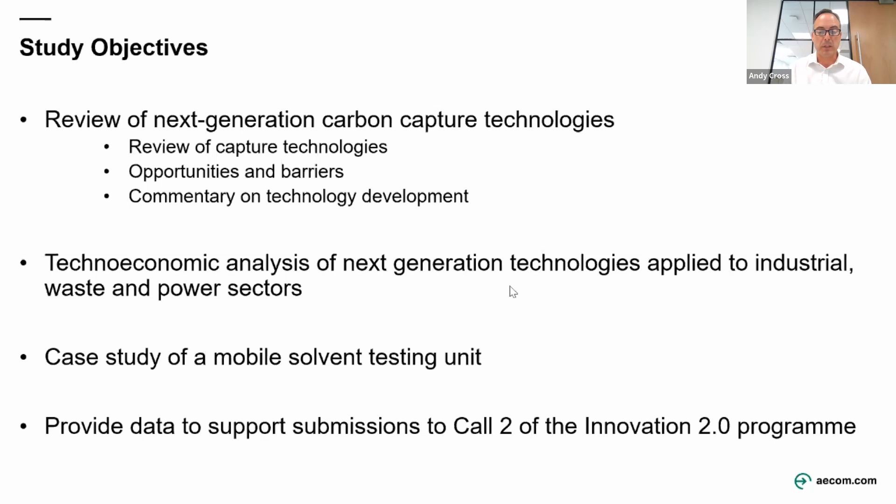So moving on to the next slide, I think that takes us on to the main body of the presentation today, or the first part of that. And I'll hand you over to David Menmuir, who's going to talk you through the review of next generation technology. David, thank you very much. Okay, thanks very much, Andy, for the introduction.

So towards the beginning of the assignment, we conducted a review of next generation carbon capture technologies. This provided our team with a really good solid foundation for completing the rest of the study. Some of you may have heard us talking about this review in a previous workshop. So today's introduction to the review is going to be shorter, but even if you've heard it before, it provides a good background for when we go on to talk about the techno-economic analysis later in the afternoon. So next slide.

So when you're considering carbon capture technologies, there's lots of new technology concepts out there, but it's important to remember that in certain industries, carbon capture is actually already done, or not done, but actually very easy to do. And these industries are industries where CO2 is naturally produced in a concentrated stream. So these are things like brewing and distilling, upgrading of biogas to produce biomethane, and chemical manufacturing processes that involve producing hydrogen from methane.

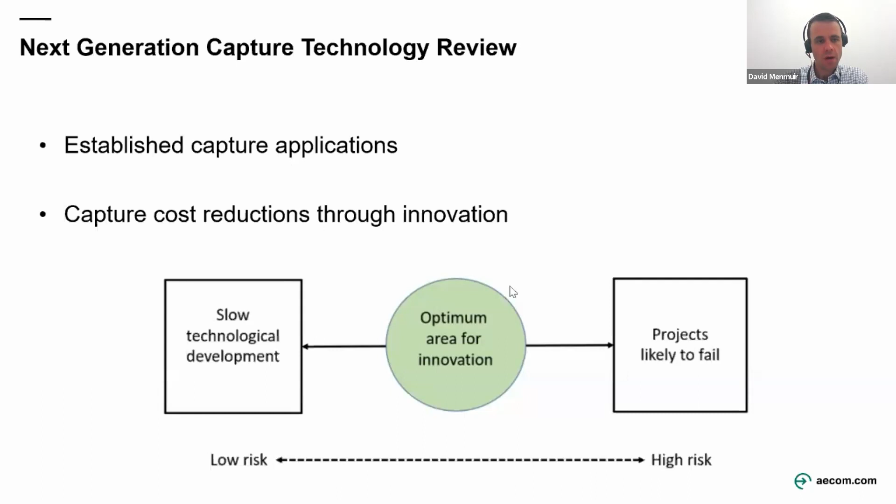So when we did the review, it was based on literature and speaking to various individuals with knowledge of the field of different carbon capture technologies. We looked at all the different technologies available and we split them out into 3 categories. So the first category was demonstration stage. And a definition of all the categories is provided in the report.

But broadly speaking, the demonstration stage technologies are fairly close to being ready to roll out at large scale. So we've classed them as likely to be deployable at 1,000 tons per day scale by 2030. And to get into this category, you have to have a reasonably large demonstration plant in existence that has also operated successfully for a sustained period of time. And our findings were that in this category, it was mainly amine-based solvent systems.

Now, these systems have been around for some time in one form or another. But when we're thinking about innovation, we think it's important not to think that there isn't room for further development. We would say there's lots of areas in which the amine-based systems can be further developed and are likely to develop as the technology is used more.

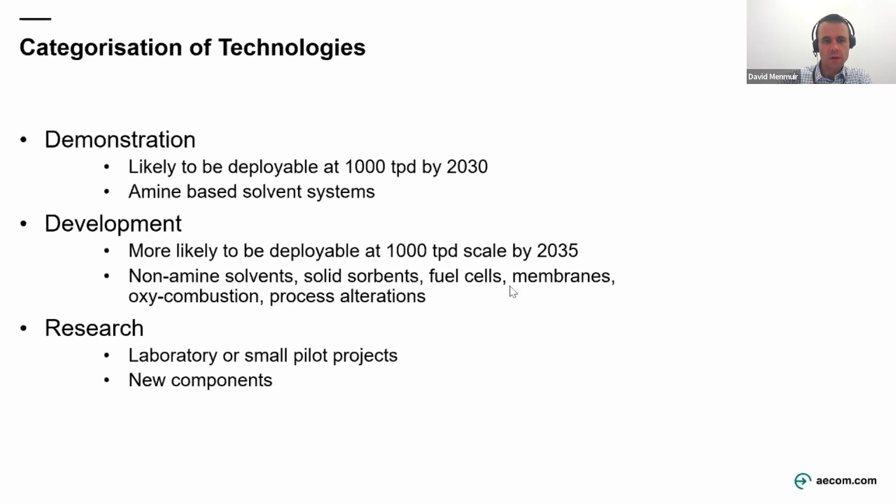Okay, so the report also covers opportunities and barriers. I won't go into all of the detail in this presentation, but in the report itself, we cover opportunities and barriers for carbon capture, and also opportunities and barriers specific to certain industries. So what might be an opportunity for, let's say, brewing and distilling or cement manufacture or chemical manufacture that's unique to that industry. Having an understanding of these opportunities and barriers is important because it gives you a more informed opinion of how and when this technology might develop and what can be achieved when it does.

So if we think about some of the high-level opportunities, many large industrial companies that operate large industrial processes will have decarbonisation as an important part of their corporate strategy. Carbon capture is one way of achieving this decarbonisation, and taking active steps to lower your carbon emissions can have positive impacts on the reputation of the organisation. If, and it's expected, the carbon price rises, so the price of emitting CO2 to the atmosphere rises, if you've found a way to decarbonise your process, this could give you a competitive advantage.

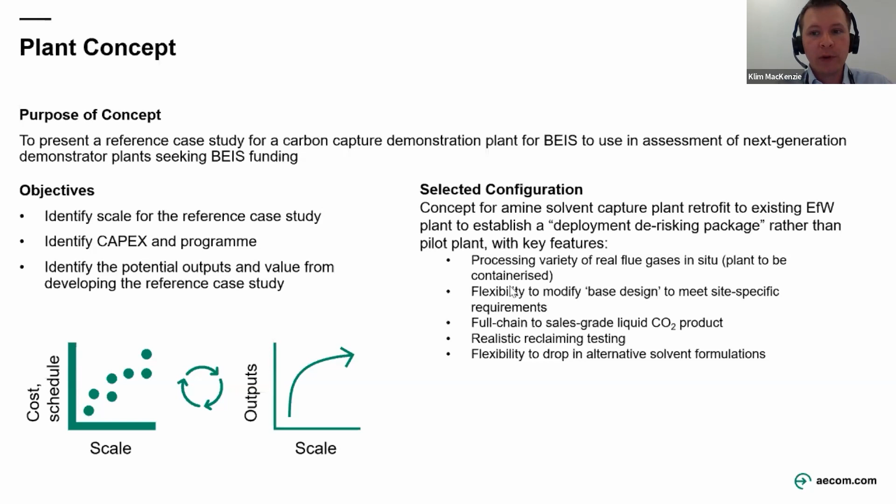And the idea is that you, as an operator, get a unit before you invest in the full-scale plant. Much like in the desalination industry, you get a pilot that would run for a year before you build the full-scale desalination plant. A similar sort of thing here. Okay, so the next slide, please, Stephen.

They may even go as far as affecting public money. If multiple projects end up carrying these risks and the risks are borne out and they have to shut down multiple projects potentially, then you may end up with a shortfall in the amount of CO2 that's shipped through a cluster. And at least the way the business models are set up at the moment, government carries some of the risk in the CO2 shipping capacity.

So the way you get around this, and where the value comes in, both to individual sites from not going out of business and wider, is to identify before you invest in the full-scale unit whether the assumptions you have regarding the pre-treatment, the energy performance, the formation of the waste are correct, or if you need to make some modifications, and you make these modifications before you commit to investing in the unit. You get an idea of the project OPEX that you might expect in the full-scale unit.

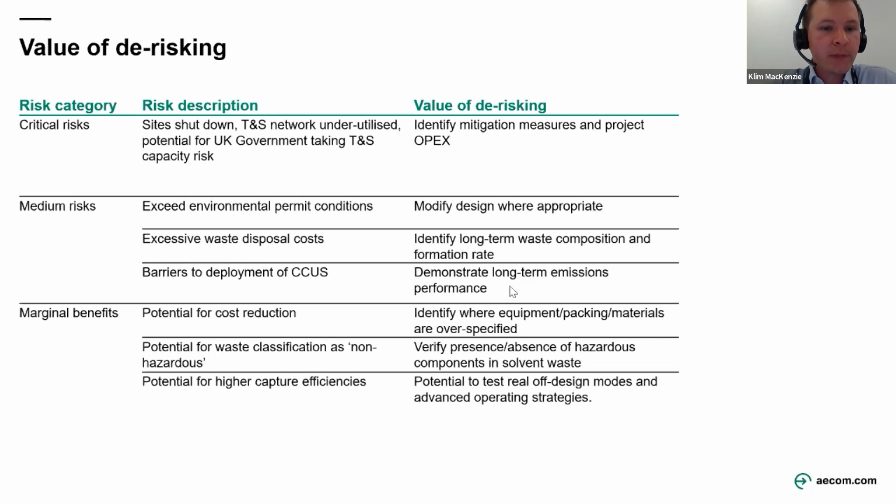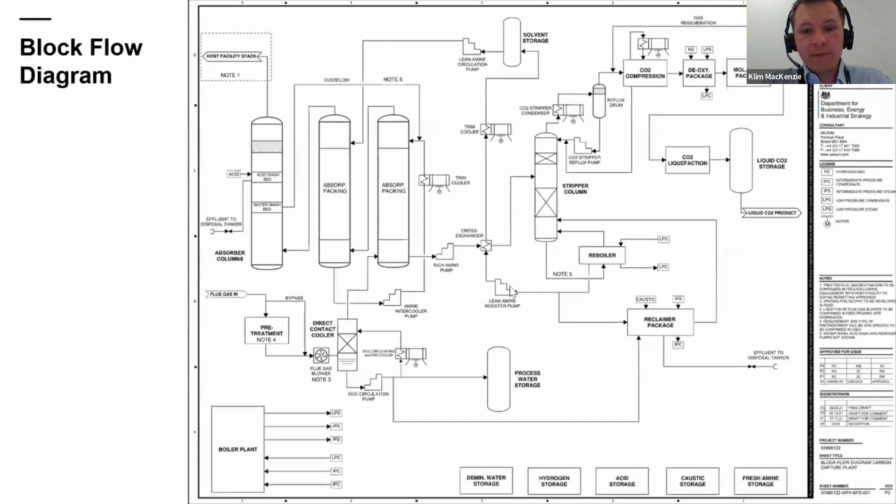Right, so the outputs of this work package. The 3 things: the scale, the cost, and how long it would take. The scale we chose was around 5 to 9 tons per day. The reason for that was to do with the minimum diameter of the stripper column that we see as the minimum threshold of giving representative packing performance. And it depends on the flue gas composition. So this unit would expect to do about 5 tons per day on, say, natural gas, CCGT type flue gas, up to 9 tons a day when the flue gas is more concentrated, and that's the range.

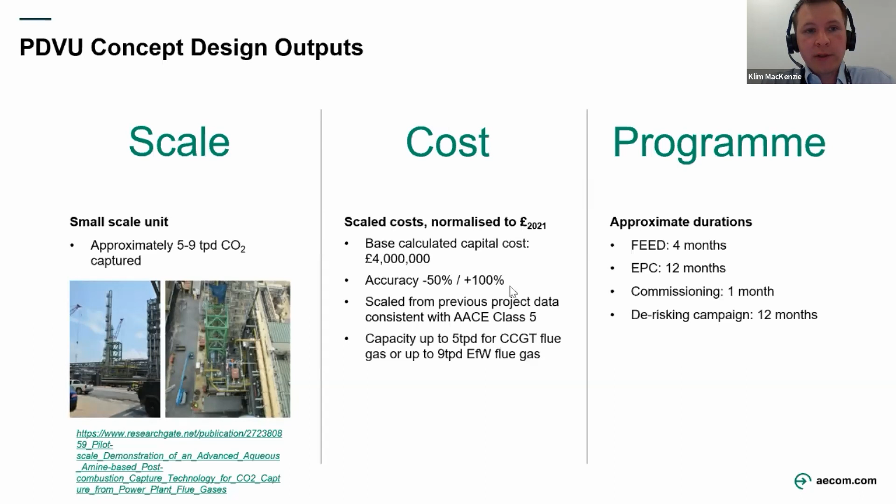The next step. So given that the design of this unit is complete, and its purpose was to inform what a typical project might look like, some potential further steps are finding willing host sites, people that are interested in having such a unit, which would be a next step to developing this further, notwithstanding the fact that that would be outside of the study, which, as I said, is now complete. Then, establishing funding for FEED and for the next phase, so any future BEIS competitions.

Then getting on with the design and specifically making any modifications for the site's requirements, and then determining contracting strategies, because obviously there's a lot of moving parts to working out a pilot plant that does a 12-month testing campaign and working out what to do with it afterwards. So I think that is it for this slide.

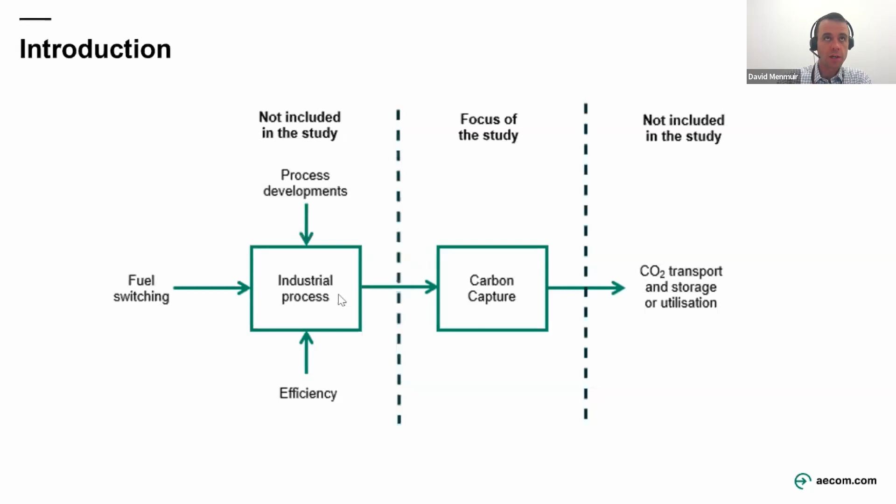And carbon capture is a technology that's related to energy. The main operating cost tends to be energy input to capture the CO2. So we've conducted our study, and in our study, we've made certain assumptions about the cost of energy, and we've detailed what they are and where they've come from in our methodology report. But of course, if the cost of energy changes, the outputs to the study will change, and that's important to remember.

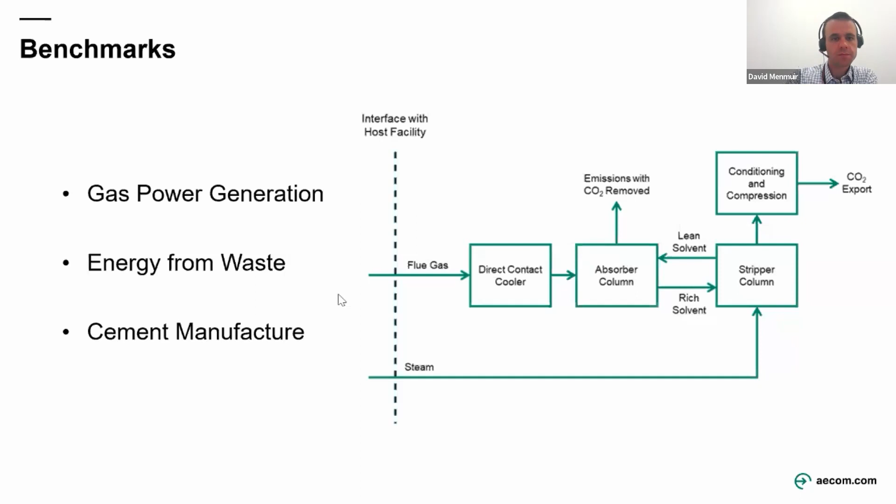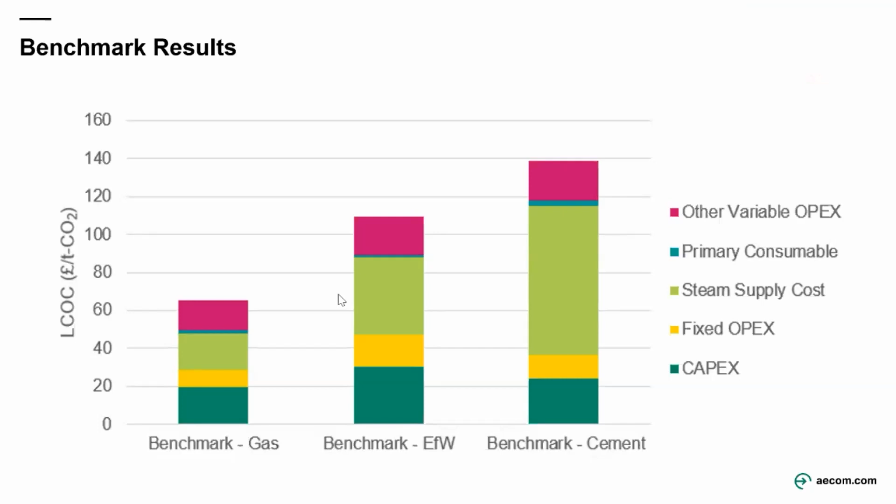It's very, very hard to get published data on costs for comparable flue gas capture applications. I mean, there's everything I could find in the BAT review that I put a link for in the chat, but it's tricky. Yes, absolutely. Yeah, there's some quite big numbers out there as well when things go wrong. Well, yeah, much of what we've done here assumes that the plants work and operate as intended and as you would hope for a process plant of this complexity.

So Mark Summerfield's asked about whether we're assuming retrofit or new build, and David, I think you've covered that since Mark posted that. So the gas is assumed to be new build. The energy from waste and the cement is retrofit, really because of the UK market and the most likely host sites for carbon capture for the different applications. Baljit Singh has asked about solvent regeneration using solar concentrated devices. We've tried to provide configurations that we think are typical and representative of what's likely to be deployed in the UK market.

So, you know, there may in a project-specific instance be the potential for that, but it's perhaps not as generic as it might be. Yeah, I think that's an example of there's lots of different ways you could supply low carbon heat, and if you're developing one of these, that's an important point to consider, but it hasn't been the focus of our study. It could really easily turn into a whole study on sources of low carbon heat. We've tried to pick a reasonable number for a cost for heat, for the purposes of comparing the carbon capture technologies.

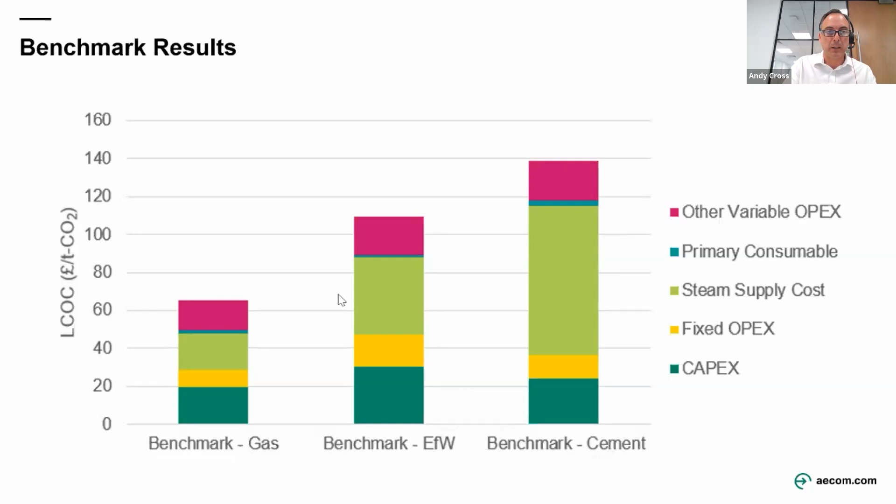So what are the advantages of taking this approach? Well, one interesting advantage is that the energy input is in the form of electricity and not steam. It does require some steam, but that's generated inside the process. So if you're at an industrial site where it's difficult or expensive to get a sufficient supply of steam for other technologies, then this plant can be operated on electricity instead.

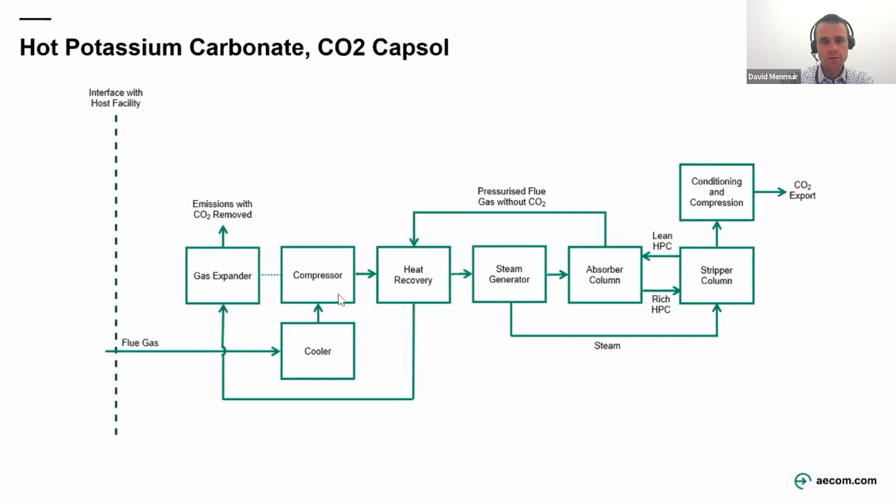If we move on to the next technology, next slide. So the next one I'm going to talk about is the use of a non-amine solvent. The one included in our study is by a company called C-Capture.

So a non-amine solvent uses a process equipment setup that's very similar to the amine solvent system. So the concept's the same in that you bring the flue gas in, you cool it down, you then have an absorber column where the solvent is contacted with the flue gas, and then a desorber column. And in many ways, it's a similar concept. And that's an advantage because it's not a whole different process that's being invented.

Another advantage, or the main advantage of this system, is that the solvent claims to have improved properties over the available amine solvents. These improved properties allow reduced energy use, reduced hazards associated with solvent toxicity and the toxicity of solvent degradation products, and also resilience to degradation. So if this different solvent chemistry has these advantages, then that's a valuable innovation.

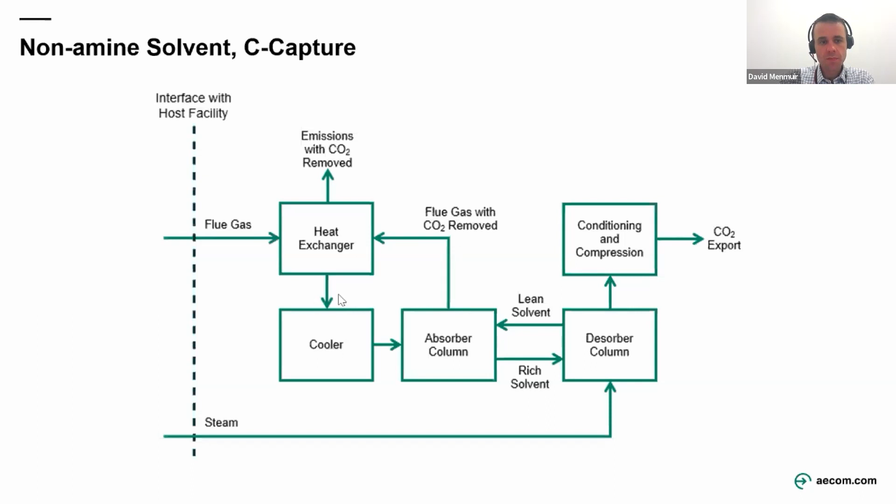Next slide, please. Okay, so this next concept, something to say straight away is that it's not strictly a capture technology. It's a process alteration that makes capture easier. And in this study, it's applied to the cement industry. So I'll try to explain it. This might be a lot easier to understand if you've got some knowledge of the cement industry, but I'll try to explain how it works.

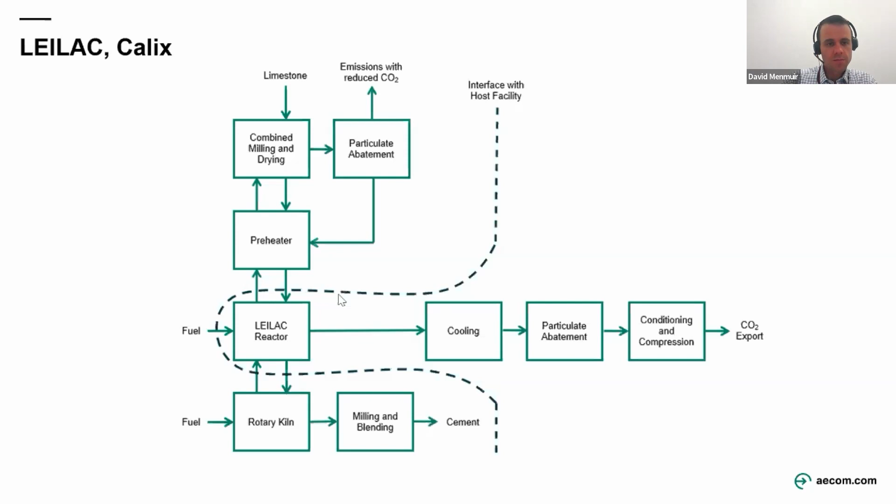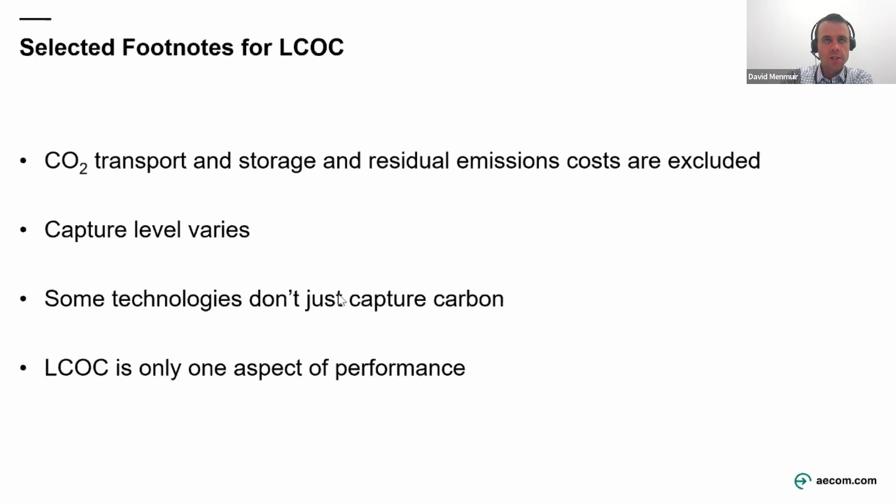What we're basically saying here is that if you take amine systems, there are still improvements that can be made to them. So these could be improvements in things like solvent chemistry, additives, different blends. They could be improvements in the process, such as energy recovery or improved ways of measuring and managing the solvent health. Or there could be improvements in things like construction.

Another point to note on the advanced amine systems is that these are often supplied by large multinational companies. So this can be an advantage when it comes to things like financing the project, because it can help if the technology comes from a company with a large balance sheet, and then they're at least able, in theory, to take an appropriate share of the risk.

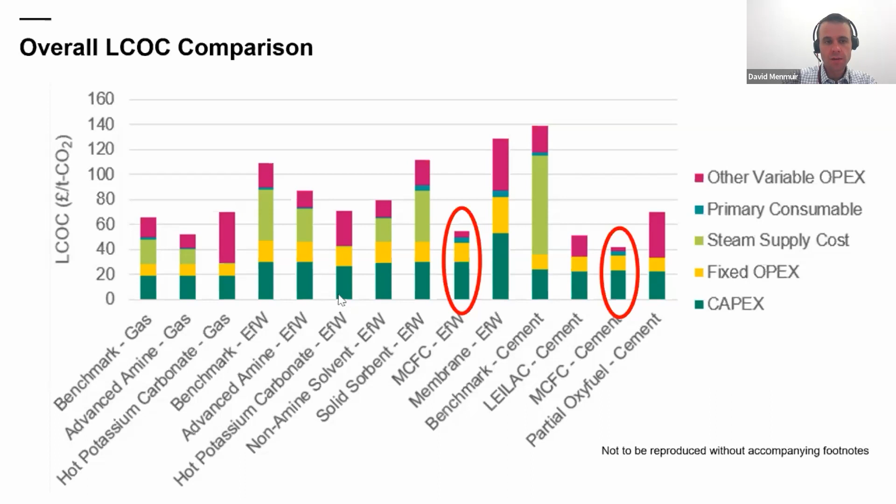That's the end of the levelized cost of capture results.

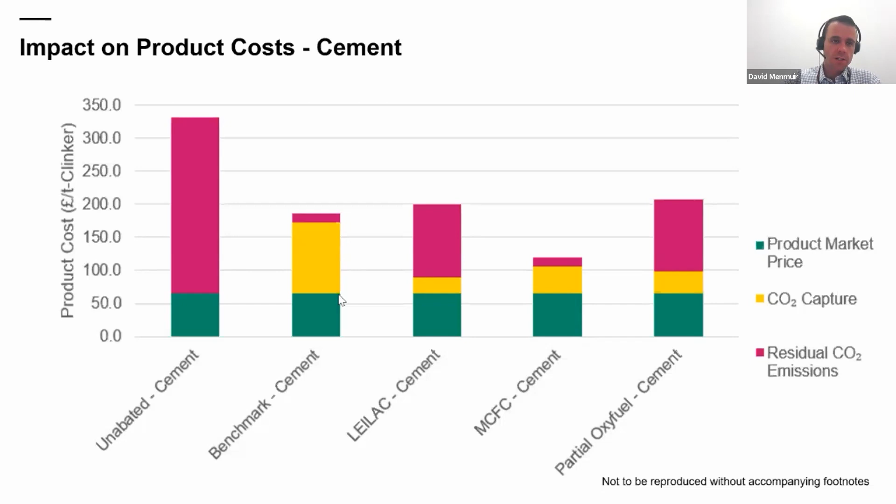Okay, so we've done the study, we've got the results, we've looked at the results, and the question comes up of what should we do now, or what should be done now? Some of the actions are continued government action on related issues. So by related issues, I mean things like permitting, CO2 transport and storage, and the development of business models so that these projects become economically viable. So that's things like applying carbon price and figuring out how it actually works in reality, and how industry still remains competitive, and how the technologies are supported. A lot of work has gone on in these areas, and it is continuing to go on in these areas, but there are further requirements in many of them.

We need to not forget about these established carbon capture applications. So things like capturing CO2 from brewing and distilling, or biogas upgrading. I think there's a real place for these in the future once the transportation and storage infrastructure has been developed. And even before then, if we're able to supply the domestic CO2 market, so that's things like CO2 used in the food and drinks industry, from a wider variety of sources, that could be valuable in relation to diversifying our supply of CO2 and making the market more secure.

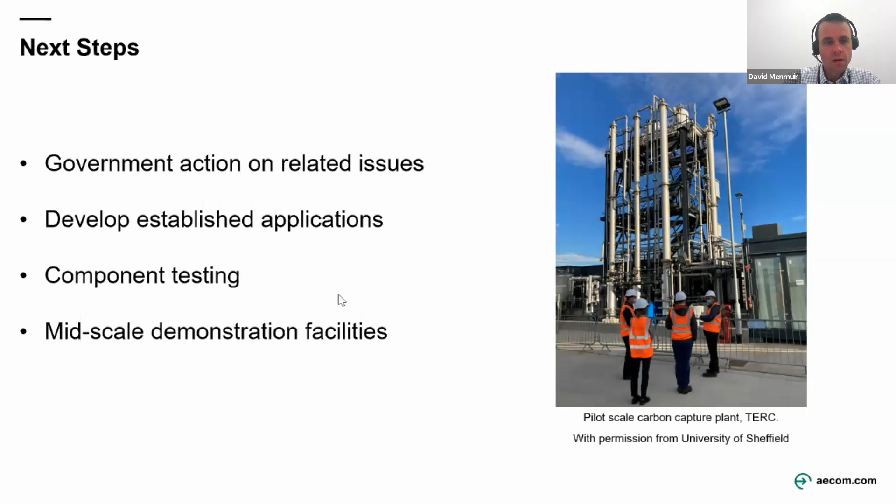Next slide, please. So just some final closing thoughts. Our team has spent 10 months on this study, and it's been a really interesting process, but what are some of our thoughts at the end of that?

Well, firstly, the role of carbon capture. We think carbon capture has a really important role to play in industrial decarbonisation, particularly in industry sectors where limited other options are available. In my mind, it's not really a question of, is this required? There are still legitimate questions about when will this happen and what scale is it, but it really seems like such an important tool that at some point we would fully expect this will happen and it will scale up.

Opportunities and barriers. So there's lots of opportunities that come out of this. There's developing new technologies, exporting new technologies, the ability to decarbonize difficult to decarbonize industries and make low carbon products. So it could be low carbon products for the UK or low carbon products for export. But of course there's barriers, and the barriers aren't just technical. They're economic, social and political as well.

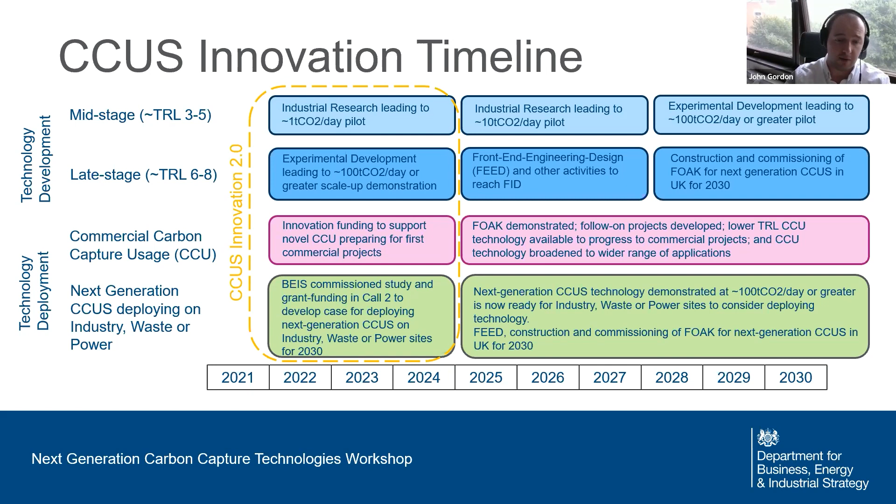Moving on through the TRL stages, we're then looking to get a 100 tonne a day demonstration facility, and then we've had the study which we commissioned on next generation carbon capture. So that's really looking into developing capture technology as we've discussed today. And then just beyond 2025, this is our ambition to get a first of a kind facility up and running in the clusters in 2030, and then also develop other technology as well behind that.

And to give you an indication of what we're looking at in CCUS Innovation 2, we launched last May 2021. We started off with the next gen study, which I spoke about today. That lasted 9-10 months, and then we had £30 million available in grant funding. We selected projects in that, and they began funding in April.

But now we're moving on to Call 2, which is following on similar to Call 1, but we've got the additional lot of funding for lot 3, and that's really focusing on the next generation carbon capture technology review, so that we can get site operators having a think about how they can deploy some of this technology if they haven't thought about it before. We're looking at some of the dispersed locations and the challenges that they face there. So we're looking at funding feasibility studies.

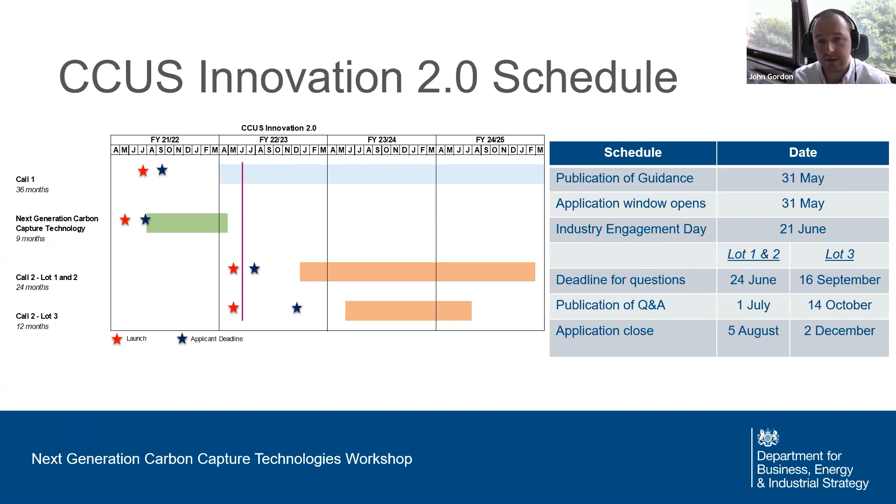Call 2, we've got £1.8 million available with ring fence for that. You can apply for up to £1 million, and for lot 2, you can apply for up to £5 million. We've got £5 million for that. So the application deadline is the 5th of August, and then for lot 3, which is looking at the feasibility studies for next generation carbon capture to be deployed on industrial waste and power sectors, the deadline for that is the 2nd of December.